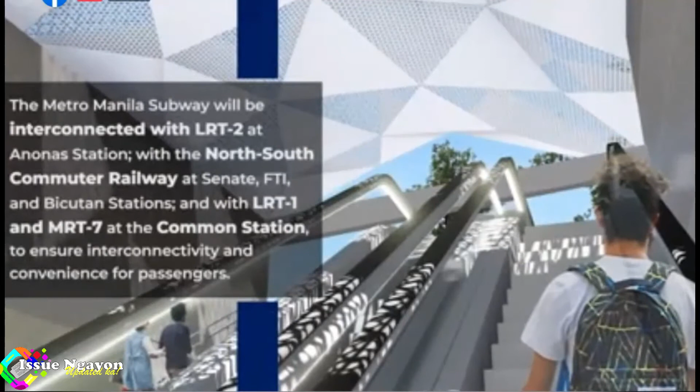Everyone, we just saw a sneak peek and learned valuable pieces of information about our first ever subway in the Philippines. And now, to continue with the program, we would like to call on the manufacturer of our tunnel-boring machines, JIM Technology Corporation, and the general contractor of the partial operability section of the MMSP, the Shimizu Fujita Takenaka EEI joint venture, to share a few words.

Let us all first welcome the president of JIM Technology Corporation, currently in Japan, Mr. Takanobu Miki.

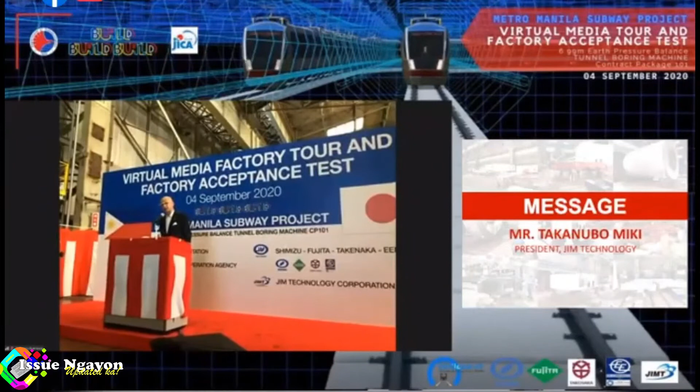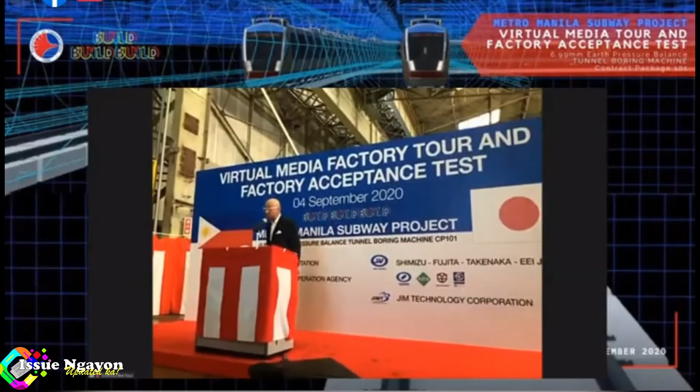Good afternoon, everyone. My name is Takanobu Miki. I'm president of JIM Technology, tunnel boring machine manufacturer. First of all, thank you very much for coming to our factory today. By the way, as you know, this year is a very tough year, and the difficult situation is still continuing all over the world, including Philippines and Japan. However, we are very honored to have the factory acceptance test of the tunnel boring machine for the first subway construction project in the Philippines today.

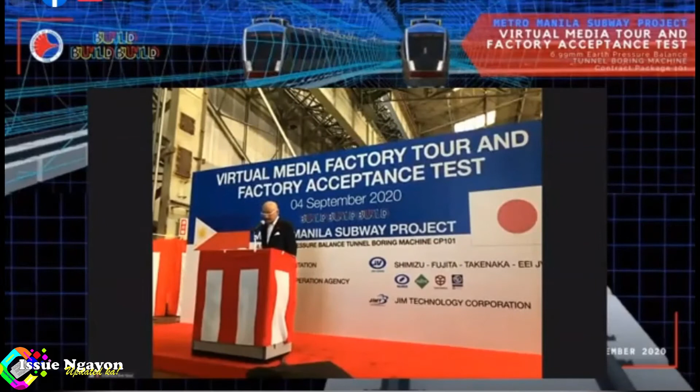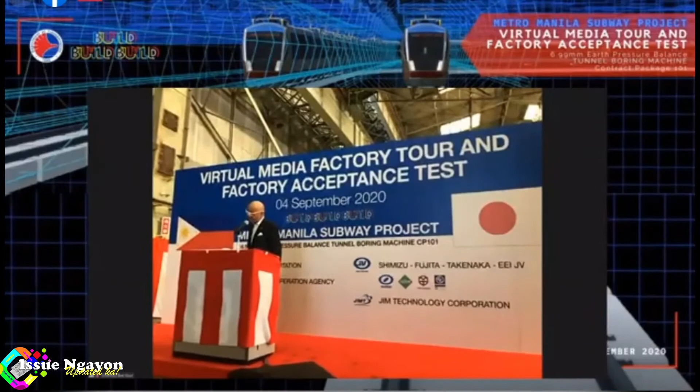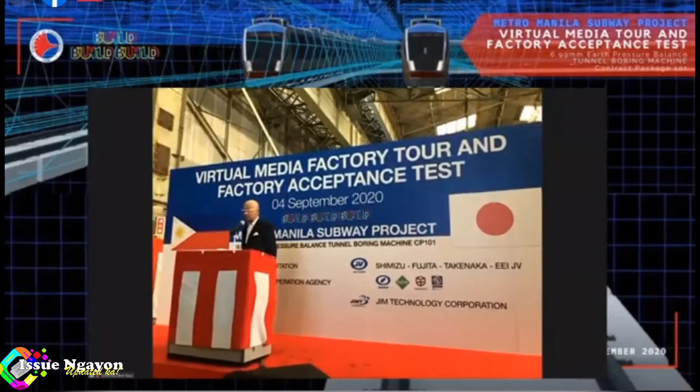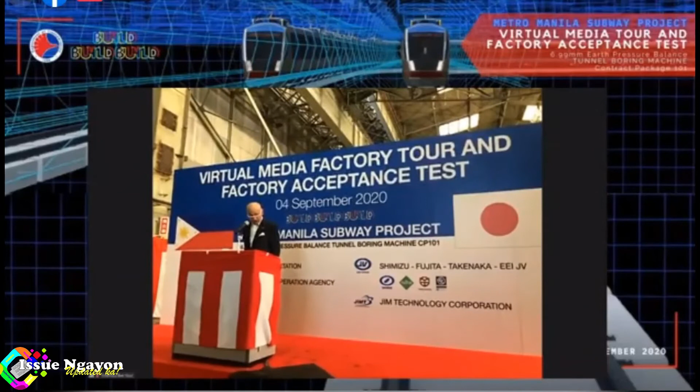This factory acceptance test was carried out by the special effort of all parties involved in this project. We would like to thank DOTR, OC Global, Japanese Embassy, JICA, and Shimizu joint venture, who have supported us always. In addition, we are very sorry for DOTR and OC Global, who are unable to attend this factory acceptance test in Japan because of COVID-19.

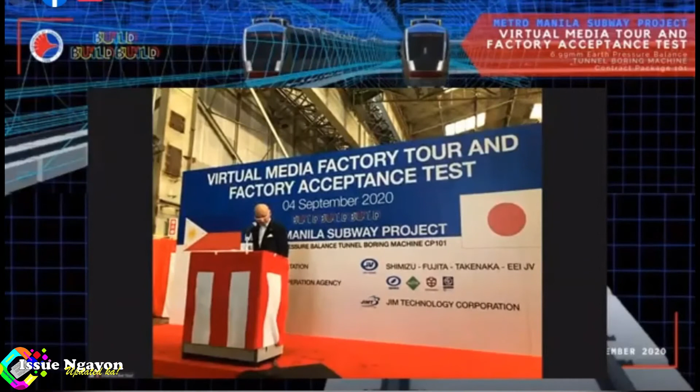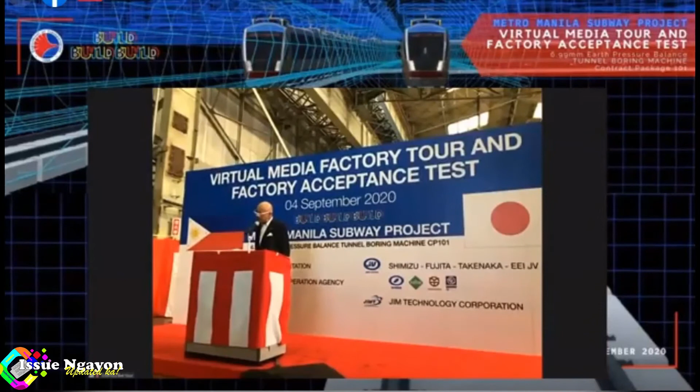But we would appreciate if you could watch this situation through live video, and we'd like to share this moment between the Philippines and Japan. Lastly, I have to say, we wish you a wonderful time, and congratulations today. Thank you very much.

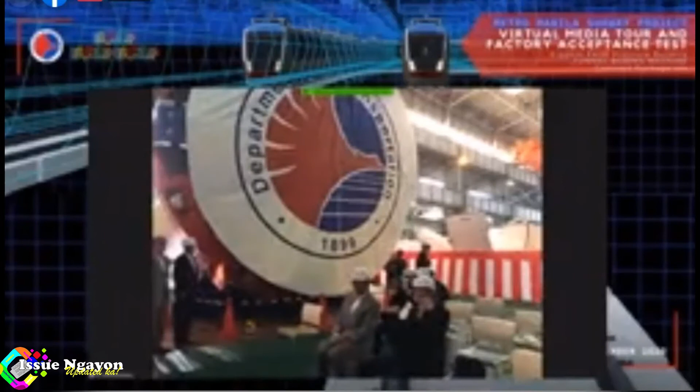And now, we are to witness how the tunnel boring machine will be operated. In 3, 2, 1.

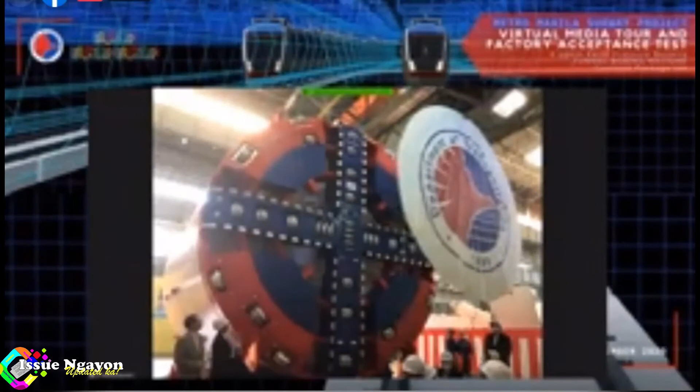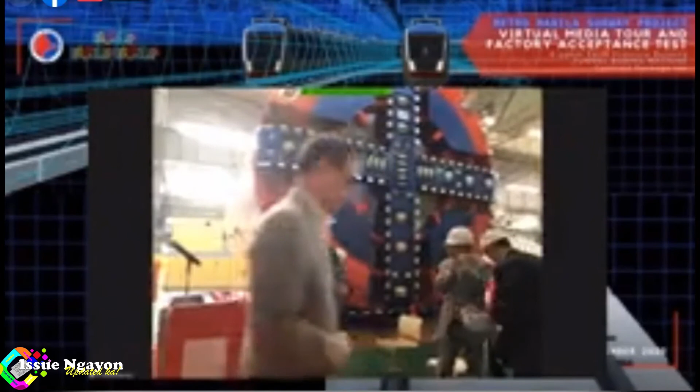So yesterday morning, September 3, 2020, a factory acceptance test, or FAT, for the first TBM of the MMSP was conducted by DOTR's General Consultants, SFTEJV, and JIM Technology Corporation. This FAT is a process that evaluates the equipment during and after the assembly process by verifying that it is built and operating in accordance with the design specification.

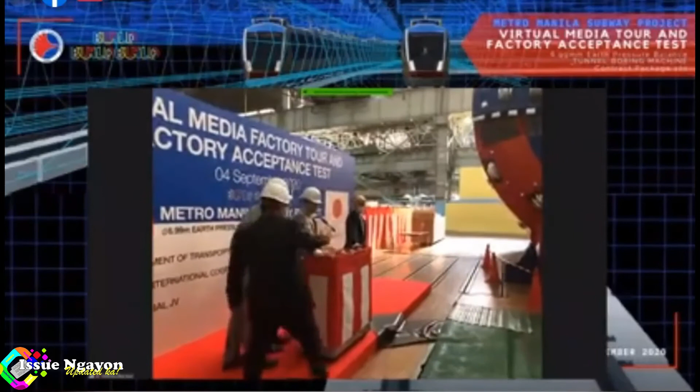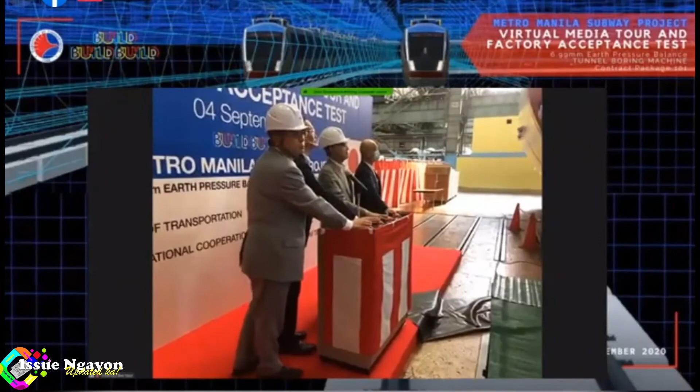There were 3 major items considered during FAT for TBM. First is the dimension, considering the diameter and length, wherein the manufactured TBM should be 6.99 meters in diameter and 9.48 meters in length. Second is the straightness, measured in a 2-dimensional tolerance to ensure that the TBM body is uniform across a surface.

The TBM body must be welded and assembled in a well horizontal manner with a 22 millimeter tolerance. Third is the cutter head rotation, designed with 43 and 80 Hz in both clockwise and counterclockwise directions, with a rotation speed of 1 rpm at 42 seconds and 2.6 rpm at 22 seconds respectively. In conclusion, the results show that all three major items have passed and been accepted.

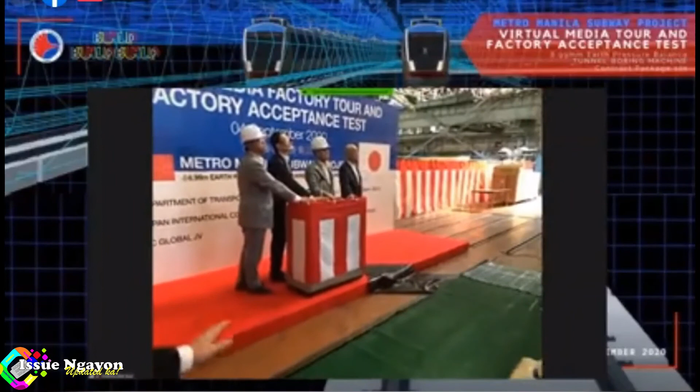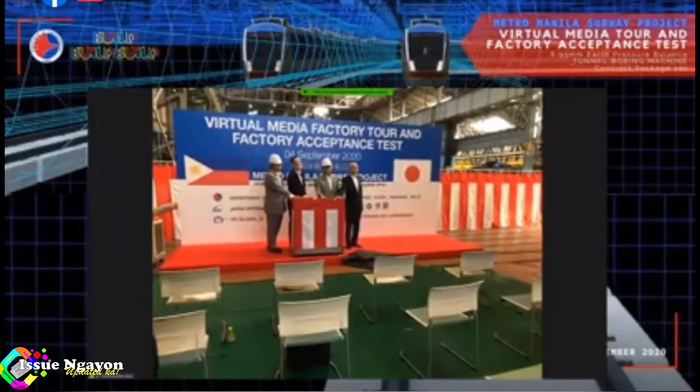And now, we are to witness how the tunnel boring machine will be operated. In 3, 2, 1.

And there you have it, everyone, the tunnel boring machine of the Metro Manila Subway project.